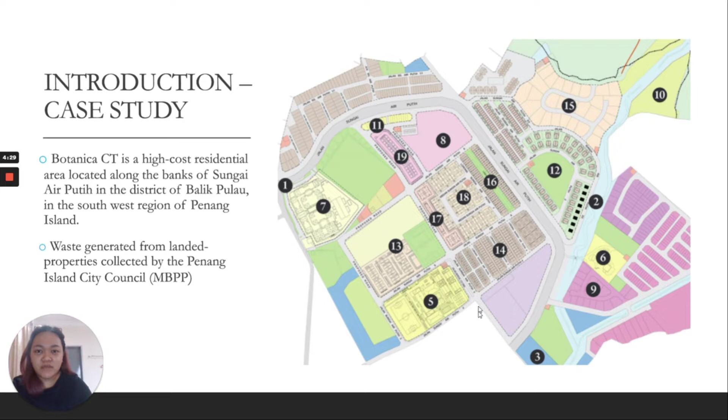As for waste generation in Malaysia, there are approximately 33,000 metric tons of waste generated per day, with a national average waste generation of 0.5 to 0.8 kg per person per day. Meanwhile, Penang has recorded a slightly higher waste generation at 0.9 to 1.1 kg per person per day, despite being one of the smallest states in the country.

Unfortunately, the practice of recycling and separating waste at household level remains uncommon and very low in Malaysian households, despite the implementation of the Separation at Source initiative under the Solid Waste and Public Cleansing Management Act 2007, which was launched in 2015 by SW Corp.

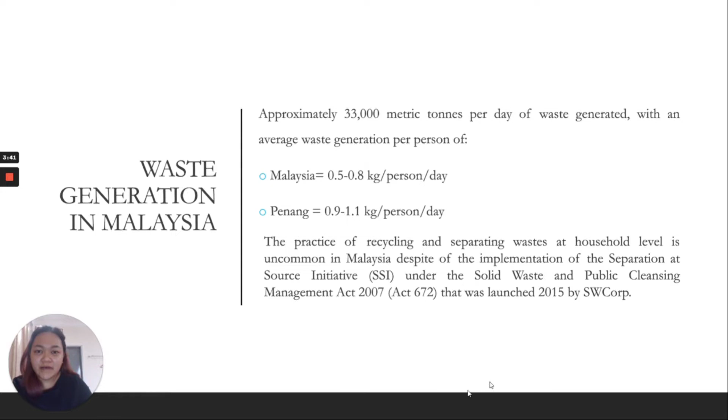This figure shows the household waste composition in Malaysia reported by the National Solid Waste Management Department in 2013. As we can see, food waste accounts for the largest portion of waste generated at 44.5%, followed by plastic at 13.2%, and diapers at 12.1%, which normally include disposable diapers for babies and elderly, as well as female sanitary pads.

Papers account for 8.5%, including old newspaper, mixed papers, and cardboards, followed by garden waste, glass, textiles, metal, Tetra Pak, rubber, and so on. It is important to note that this waste composition may vary according to different seasons, geographical region, as well as the socio-economic status of a particular area.

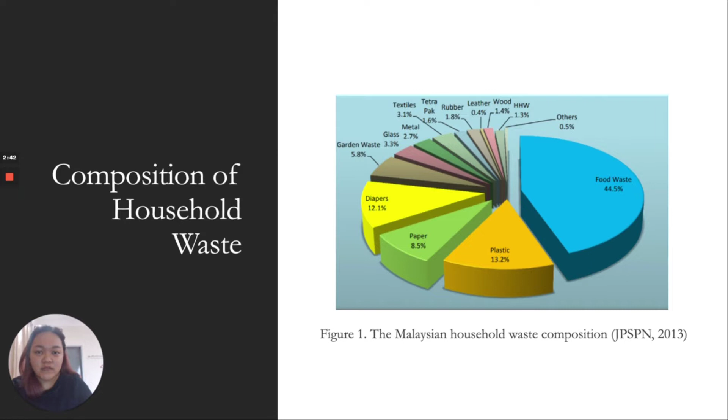Next, the waste generation in Botanica City. We assume that there are a total of 400 landed housing units in this high-cost residential area, with an average of 5 households in each housing unit.

Therefore, the total waste generated will be 61,600 kg per month, considering the average waste generation is 1.1 kg per person per day. Assuming separation at source is fully implemented where each household segregates and recycles their recyclable waste, including plastic, paper, glass, metal, and Tetra Pak, the total household recyclables will be 18,700 kg per month.

The remaining non-recyclable waste will be 42,900 kg per month, which is the amount of waste that will be collected by the waste collector and transported to the MRF for further treatment and recovery processes prior to final disposal at the Pulau Burong Sanitary Landfill.

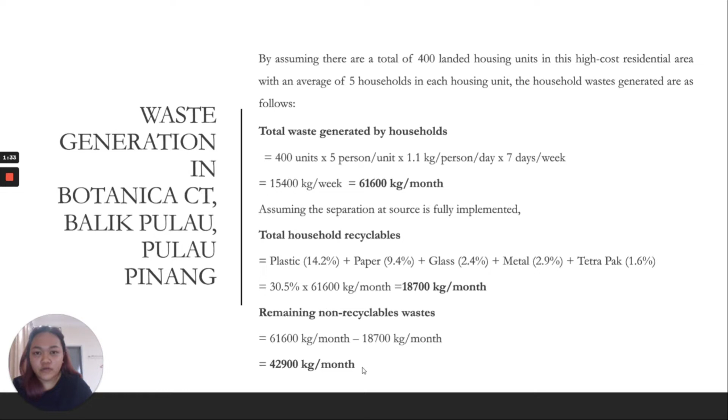There are two systems to collect rubbish in Penang State, divided into the primary collection system and the secondary collection system. The primary collection system is where undressed solid waste is put in the personal dustbin by residents, and the other is where the solid waste is transported from the dustbin to refuse transfer stations and landfills.

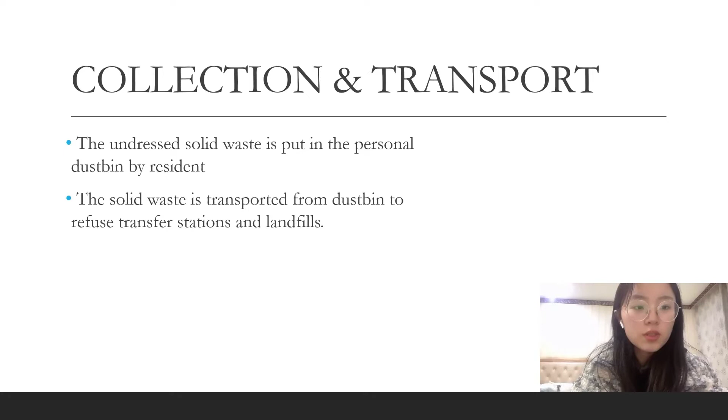The distance from the final collection point of the waste is 35 kilometers before the waste is transported and unloaded at the waste treatment landfill.

To move a compactor truck with a load of 1 ton, the average fuel consumption is 10 liters per 50 kilometers. The price of fuel is 1.8 Ringgit per liter, if the government provides 2 trucks for the area.

We know the quantity of waste that will be transported to the waste treatment facility will be 42,900 kilograms per month. So the amount of waste we need to process every day is 42,900 divided by 30 days, which is 1,430 kilograms per day.

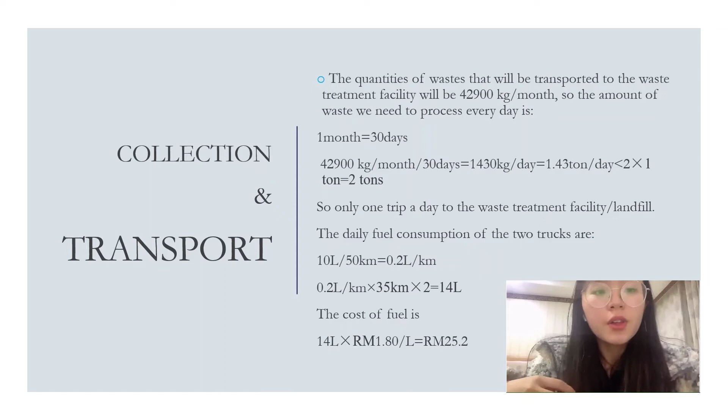So only one trip a day to the waste treatment facility, the daily fuel consumption of 2 trucks is 10 liters per 50 kilometers, which is 0.2 liter per kilometer. 0.2 multiply by 35 kilometers multiply by 2, it is 14 liters. The cost of fuel is 14 liters multiply by 1.8. So finally, we get 25.2.

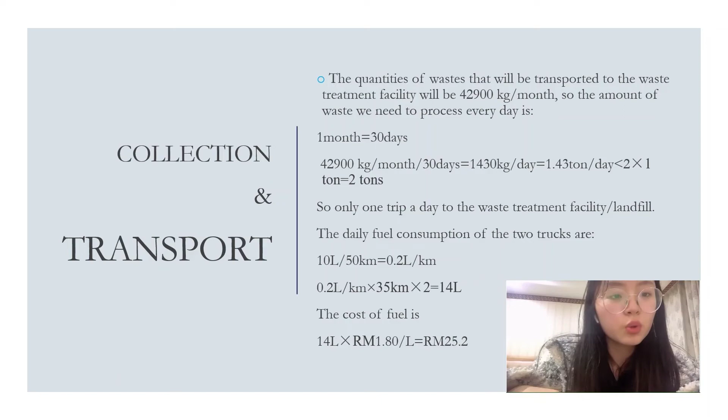Hi, my name is Elisa Amira. I'm a second-year environmental technology student, and I will be talking about the treatment and recovery part of the municipal solid waste management process in Botanica CT in Balik Pulau Pinang.

So firstly, why is waste treated? It is treated to reduce the impact on the environment as much as possible, and this can be done by transforming it physically, chemically, or biologically.

So in our project, the waste is collected by the Pulau Pinang City Council and then taken to the thermal treatment plant, and then it will be taken to the Penang transfer station and finally to the Seberang Perai sanitary landfill.

The treatment happens at the thermal treatment plant by way of incineration, which is a chemical transformation. What happens is the waste is burned, which can reduce the volume of waste by up to 90% and reduce the weight by up to 75%.

The waste that's burned is converted to ash, flue gas, and heat. The heat can be used to generate electricity.

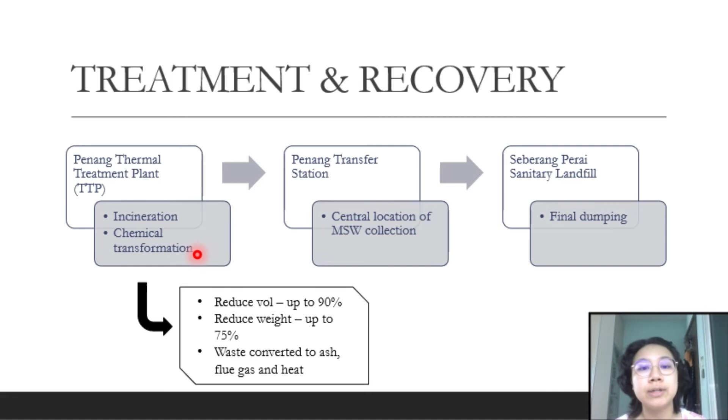Here I've calculated the amount of waste reduced during the incineration. Given the formula and the waste reduction rate taken from a case study on solid waste management in Perai, also from the waste, the non-recyclable waste generated by Botanica CT, we find that the amount of waste after incineration...

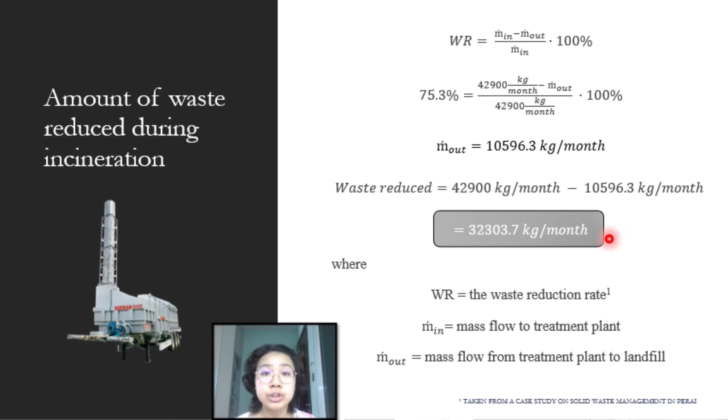...has decreased a lot. As we can see, the waste has been reduced down to 10,596.3 kilograms a month, meaning that the waste reduced is 32,303.7 kilograms per month. This shows that there is a large decrease in the amount of waste disposed at the landfill.

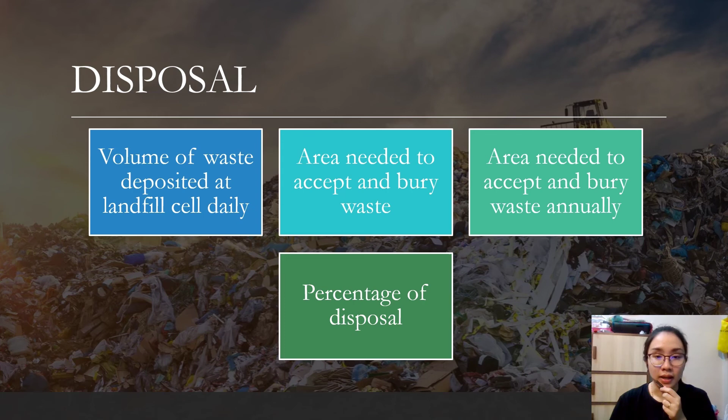Hello, I'm Lillian and I'm going to present on the disposal part. In my part, there are a few things that I have determined, firstly the volume of waste deposited at the landfill cell daily, next the area needed to accept and bury the waste daily and also annually, and lastly the percentage of disposal.

So, the material left after the waste has undergone the recovery and treatment process will be sent to landfill for final disposal. The volume of waste deposited at the landfill cell can be calculated using the equation: mass flow from treatment to landfill divided by the density of waste. In this case, the density of waste is assumed to be 480 kg per meter cube. The volume of waste deposited at the landfill cell per day that I have calculated is 0.736 meter cube per day.

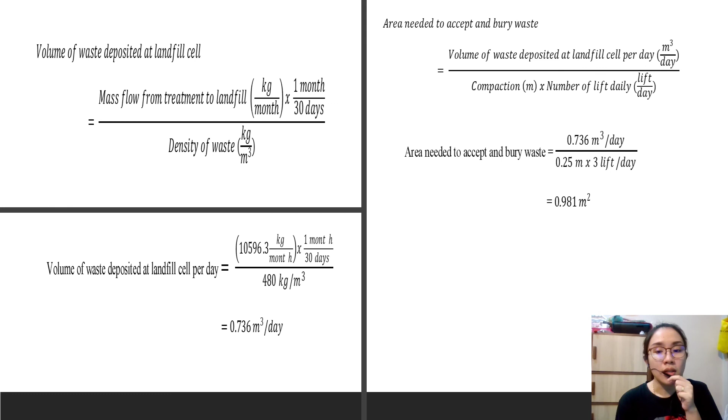Next, the area needed to accept and bury the waste can be calculated using the equation: volume of waste deposited at the landfill cell per day divided by the compaction and number of lifts daily. In this case, we assume the waste is compacted to 0.25 meter horizontally, with three lifts daily. Substituting all the values into the equation, we find that the area needed to accept and bury the waste is 0.981 meter square.

Meanwhile, the area needed per year can be calculated by multiplying the area needed daily by 365 days. So, the area needed to accept and bury the waste per year is 358.065 meters square per year.

Lastly, the percentage of disposal is calculated using the equation: waste disposed in landfill divided by the total waste generated, then converted to percentage by multiplying by 100%. So the percentage of disposal is 24.7%. This means that 24.7% of the waste from this residential area is being disposed at the landfill.